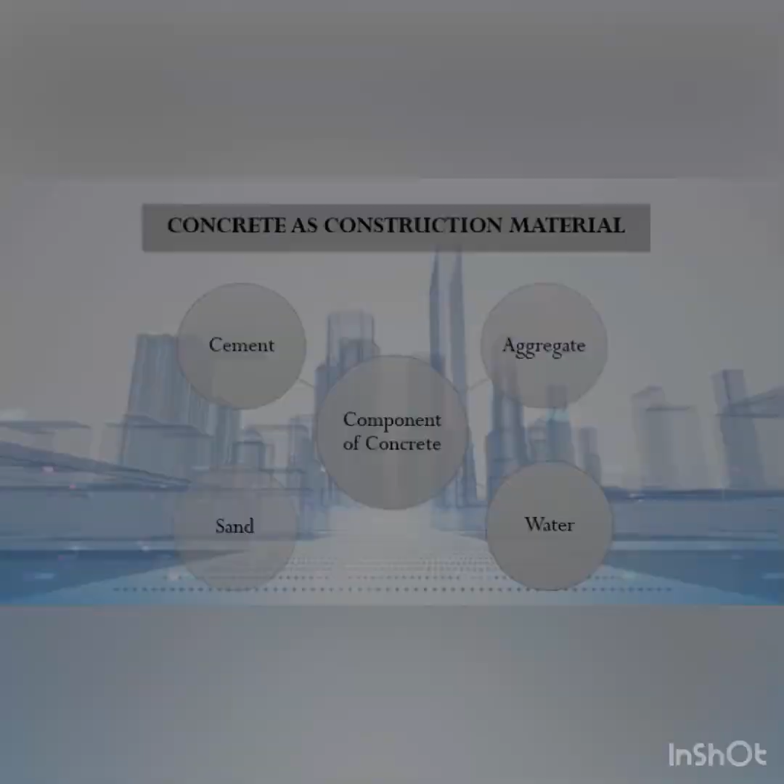Next, for this slide, I will explain about properties of concrete. Firstly, concrete can be considered as durable material which can last a lifetime or long-lasting. The term of durability applies to something that can last for a long period of time without drastically degrading and deteriorating it. If concrete is correctly installed and properly maintained, it is able to resist weathering, chemicals, and abrasion.

Besides, concrete also is easy to handle. Thirdly, it can be molded into different shapes and sizes of formworks. Thus, this characteristic enables various structural members to be constructed, including beams, columns, slabs, footing, and lintels.

Apart from that, concrete has a relatively high compressive strength, which is up to 8,000 psi. That means it does not break under weight. Last but not least, it has significantly lower tensile strength, which is almost zero. That means it will crack when being pulled.

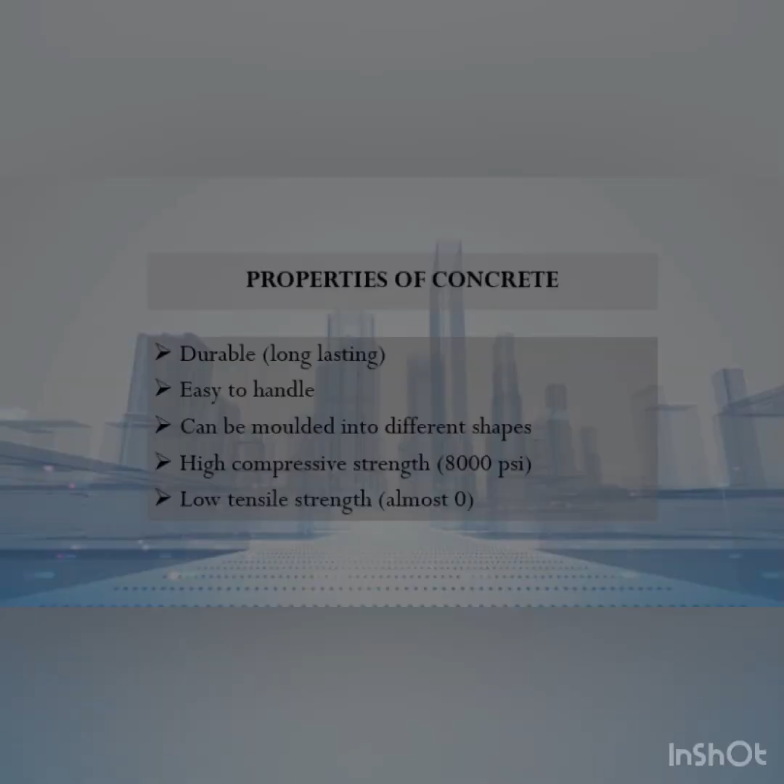The fourth slide is about concrete batching. Batching is a measuring process where the quantity or proportion of materials such as cement, aggregates, and water are determined to prepare the concrete mix on the basis of either weight or volume. Batching is traditionally done by volume, but most standards require concrete batching to be done by mass rather than volume. However, it is preferable to do proper volumetric batching if accurate weigh batchers are not available.

A structure's durability highly depends on the quality of concrete used in it. Hence, if we require a concrete with high and durable quality, selection of concrete ingredients with a lot of precision is a must, and that can only be produced by concrete batching.

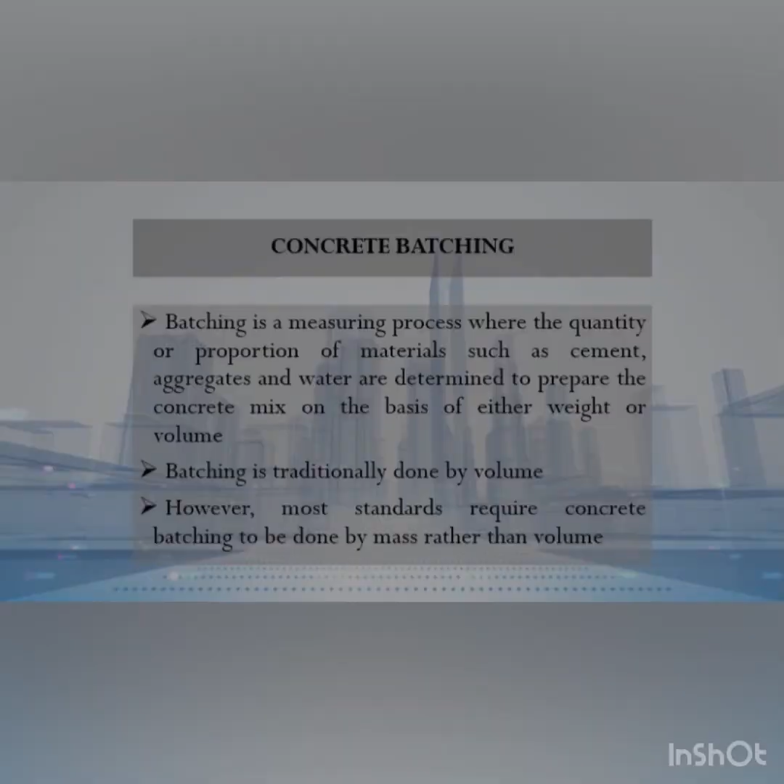Methods of concrete batching. There are two methods of concrete batching. The first one is volumetric batching or volume batching. In this method, materials are measured and determined on the basis of volume. This batching method is considered less precise. For material measuring, measurement boxes or gauge boxes of known volume are used.

Volumes of various size, fine aggregate and coarse aggregate are measured by gauge boxes individually. Care must be taken to ensure that they do not overfill the gauge boxes. Water meter or water cans of known volume are used to measure the water. Water is measured either in kg or liters.

The second one is weight batching. In this method, the proportion of concrete materials are measured on the basis of weight. This method of batching is considered accurate. The measuring is done either by using weight batchers or other types of weighing equipment. Two available types of weight batchers are mechanical weight batcher and electronic weight batcher.

Weight batchers may be available in manual, semi-automatic, or fully automatic. Manual type is used for small concrete production work, while the other two types are used for the larger ones. The benefit of using automatic weight batcher is it can measure the existence of moisture content in the aggregates and correct the required volume of water cement by taking moisture content of aggregate into account.

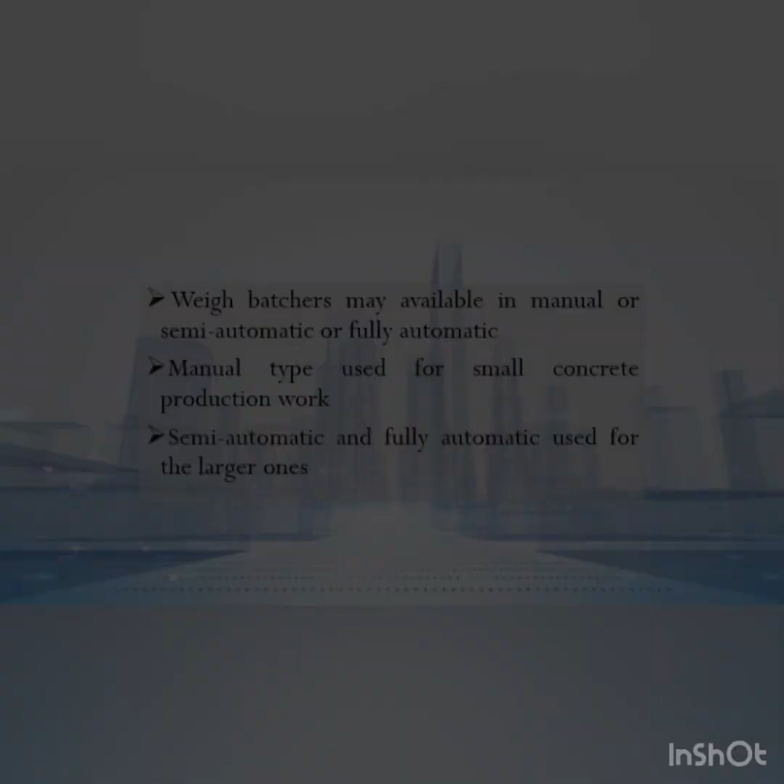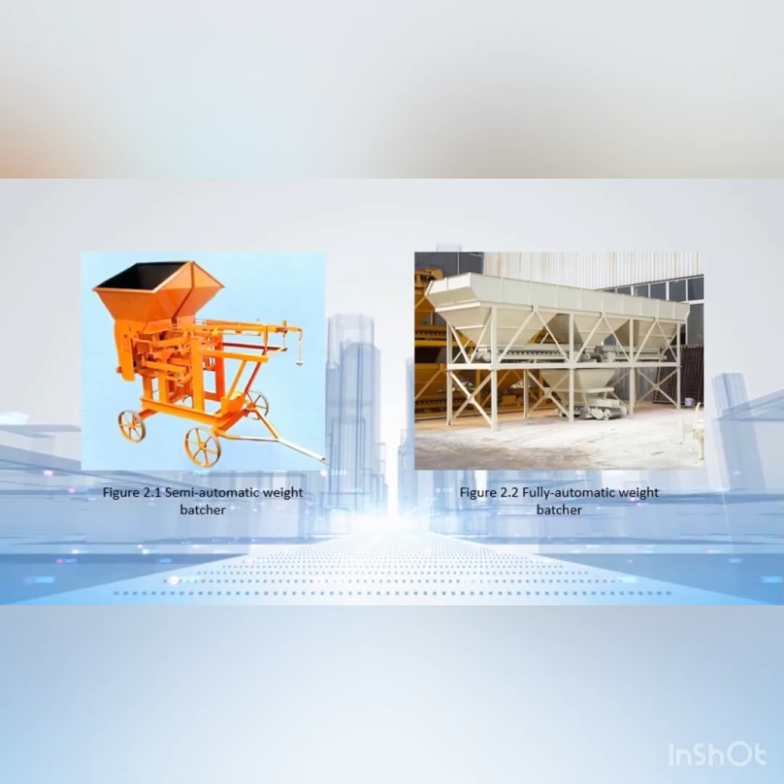Figure 2.1 shows us the picture of semi-automatic weight batcher, and the second picture in figure 2.2 shows us the picture of fully automatic weight batcher. Then we will move to operation of concrete batching.

The choice of batching method is based on size of construction work, production rate, and standards of batching performance. As we know, concrete is made up of three basic components, which are water, aggregates (rock, sand or gravel), and cement. Once concrete mix design is conducted, the first task is to batch the concrete materials.

Concrete batching is carried out by measuring and mixing the necessary concrete ingredients, either by weight or by volume as per the mix design. Once the ingredients are batched, they are incorporated into the concrete mixture to create a uniform and homogeneous concrete mix. Then, a concrete mixer machine is used to mix the cement, sand, and aggregates all together.

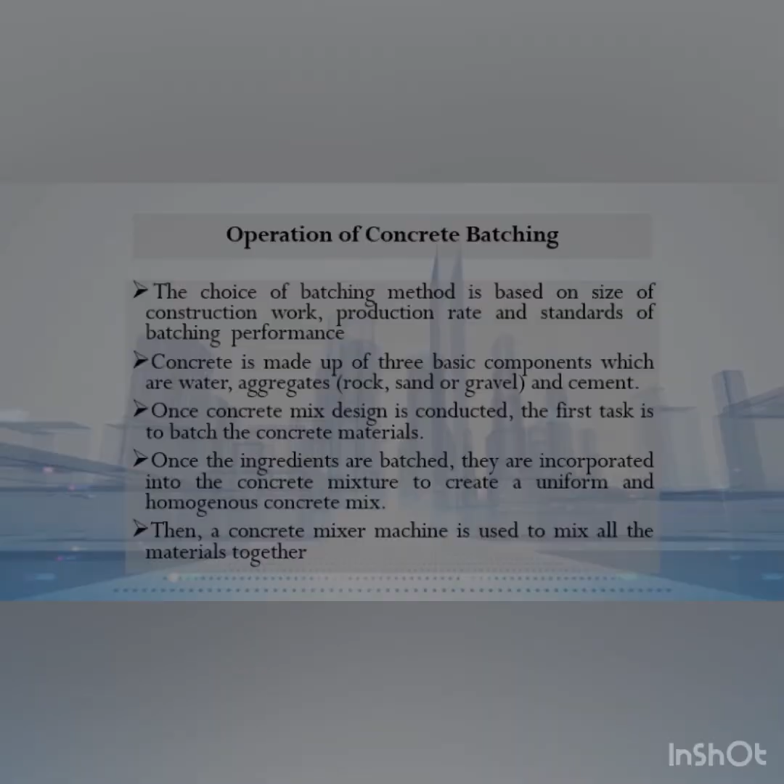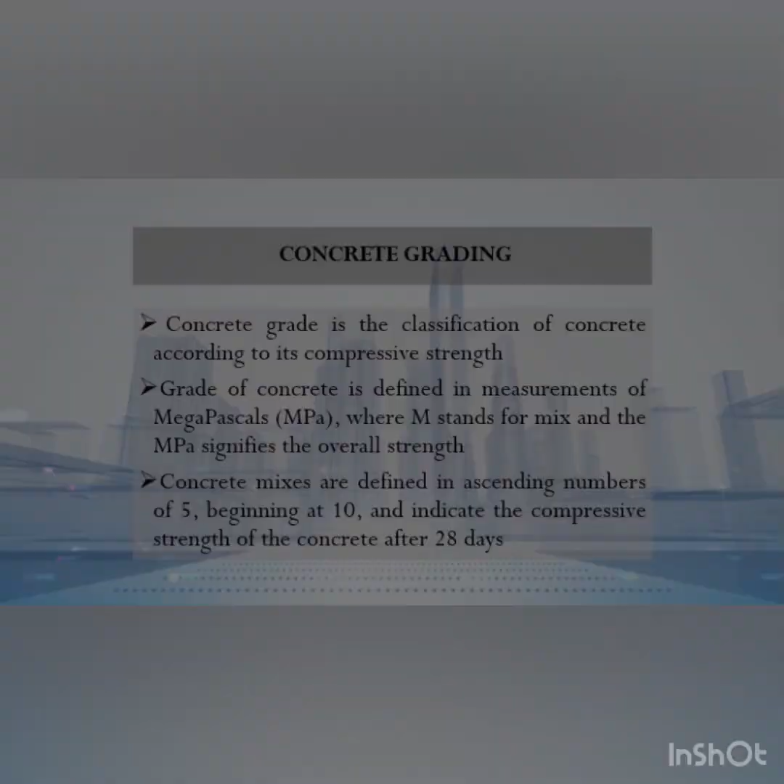M5 and M7.5 are both used to provide the foundation concrete with a uniform surface and to avoid direct contact of the soil with the foundation concrete. Grade M10, M15, M20 can be categorized in normal or ordinary concrete grades, while M25, M30, M35, M40, M45, M50 and M55 can be classified in standard concrete grades.

The high-strength concrete grades are best used for RCC or reinforced cement concrete work, where high compressive strength is needed, such as high-rise buildings, long-span bridges, and ultra-thin white tops. M60 and M80 are used for construction located in aggressive environments and applied in constructing spillways of dams, coastal construction, and a passage for surplus water from a dam.

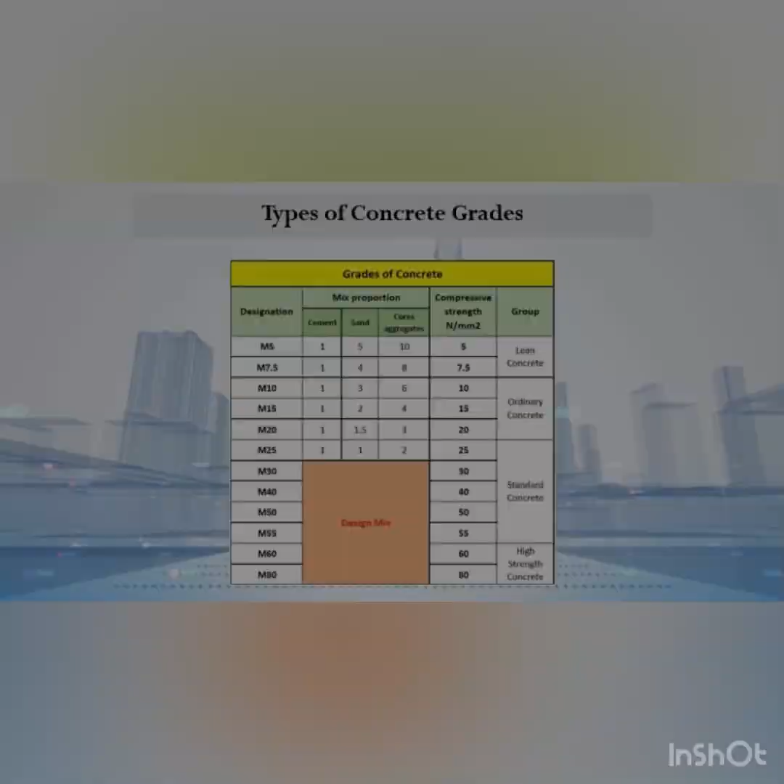Next, I will explain about the operation of concrete grading. A concrete grade denotes the strength required for construction. The concrete works require the use of cement, sand, aggregate, and water, which are mixed with a certain ratio. Then the concrete is formed and placed in a 150 mm square cube and left in a water tank for 28 days before the compression test, which is used to examine the strength, is conducted. The strength is measured with concrete cubes or cylinders by civil engineers at the construction site.

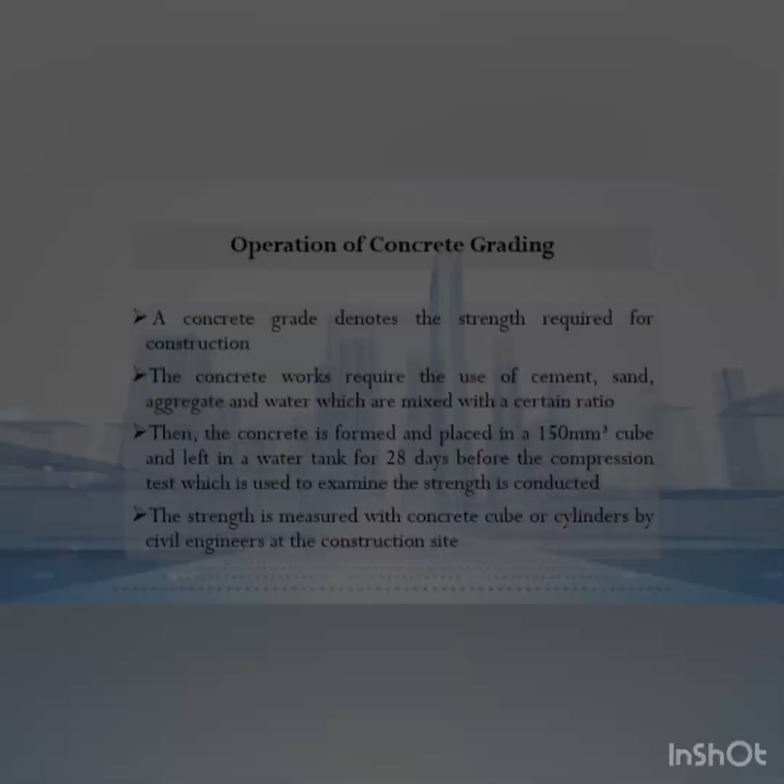In conclusion, concrete is a versatile, durable, sustainable, and economical material which has been used worldwide until today. The proportion of concrete materials should be properly and accurately measured in order to produce excellent quality concrete. By conducting batching works, we may achieve the accuracy of the concrete material's proportions. A proper batching can improve concrete's workability by reducing the possibility of concrete segregation or bleeding. Therefore, batching is considered as one of the most important works during the construction of a building.

Apart from that, grading of concrete is also a must, as this work enables us to choose the suitable and right concrete grade for a construction work. Each concrete grade has its own use and what it is best used for. For instance, M40 is best used for commercial construction sites, constructing foundations and beams for structural support, and roads.